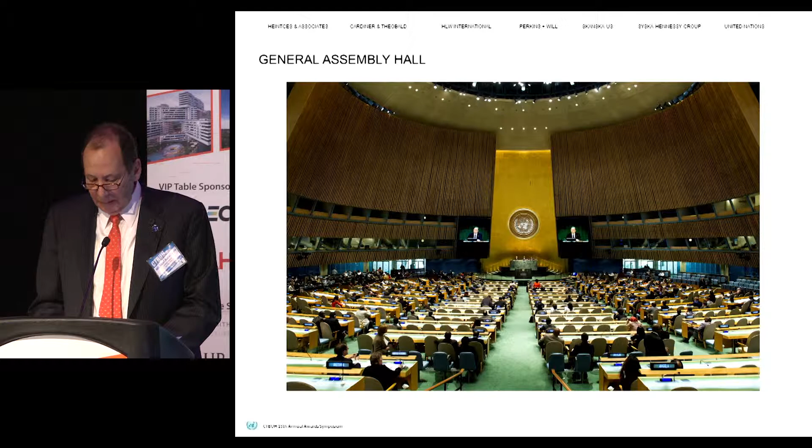There were other important drivers to the Capital Master Plan as well, and a critical one was to improve the functionality of a facility designed for 50 member states in a family that has grown to 193 countries. Another was to make the headquarters accessible to all.

The UN headquarters was completed in '51 in accordance with the New York City Fire Code at that time, which dated from 1938. Much has changed over the years, but up until 2010, the UN headquarters remained largely unaltered. Consequently, much of the complex lacked sprinklers, fire and smoke detection, and modern building management systems. All of this has changed during the Capital Master Plan.

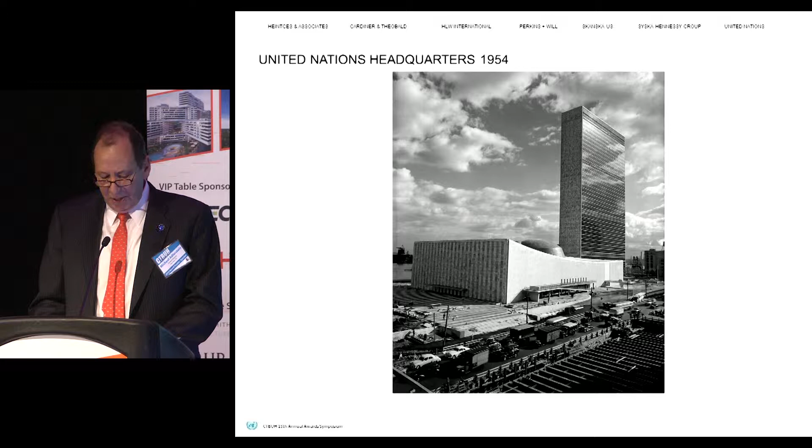Although the United Nations is sovereign and therefore not subject to New York City building codes and other regulations, at the beginning of our project, we reached an agreement with city authorities to voluntarily apply the New York City Code to our project. We did not file for building permits or await certificate of occupancy, but the city agreed to review our construction documents and conduct voluntary visits, which were not inspections, to review our work every two weeks throughout the project. As the New York City firefighters are the first responders to any emergency at the UN, it is certainly in our mutual interest for the host city authorities to be familiar and comfortable with our facilities.

A primary concern of the United Nations in the 21st century is security. Unfortunately, the United Nations has in recent years been the target of terrorist attacks in Baghdad, Algiers, Kabul, and elsewhere. On First Avenue, we installed blocks of bollards, among other security measures, and we added layers of steel and concrete over the FDR drive. Due to necessity, our project required significant improvements such as these to the security infrastructure to provide greater protection to the UN staff, visitors, and delegates.

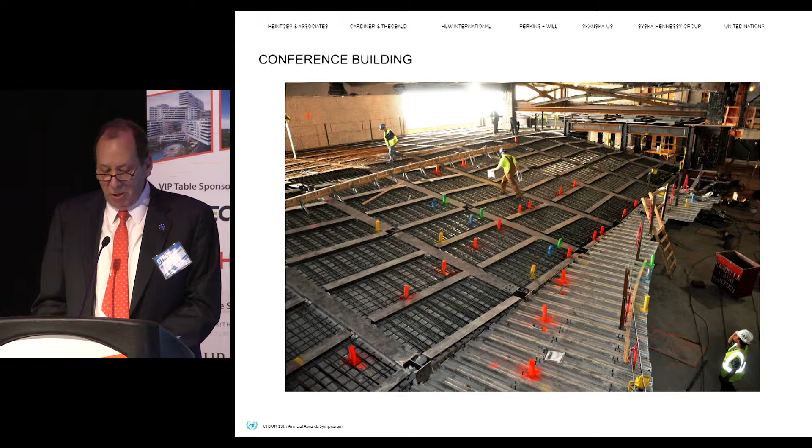I can take you back to the amazing charrette that created the United Nations compound. The General Assembly decided in 1946 that the headquarters of the UN should be in New York City, and an international design team was selected and assembled by the UN, known as the Board of Design, with Wally Harrison serving as director. The board consisted of a dozen outstanding professionals, each representing a different country, including Le Corbusier representing France, Oscar Niemeyer representing Brazil, Nikolai Bassov representing the Soviet Union, and Howard Robertson representing the UK.

In four months, in 1947, the board hammered out a final design concept that was presented to and accepted by the General Assembly. The UN compound is generally unchanged from that concept, developed in just months in a design charrette by a dozen-person team that had never worked together before and spoke no common language, except design. Their success is obvious. The UN is one of the few examples of 20th century, mid-century design, modern architecture, which is today recognized all over the world.

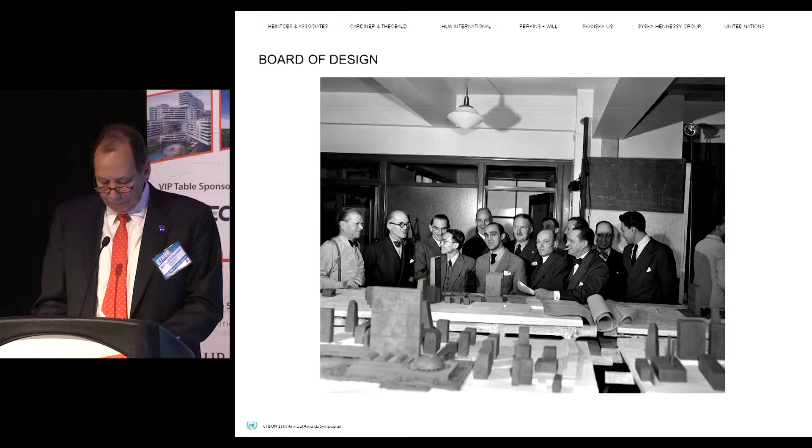The UN complex includes six buildings totaling 2.6 million square feet and houses approximately 6,000 full-time staff. The complex helped define modernism with its simple and sensual lines, its generous use of glass, and the incorporation of post-war high-tech materials like Naugahyde, Formica, and stainless steel. And in the 1950s manner, it was sustainable, with east-west rather than north-south exposures, large open spaces saved for the garden, operable windows, and many other green measures. Features such as the use of local materials were incorporated, not to save energy, but to allow the composition to fit in with nature in a more harmonious way.

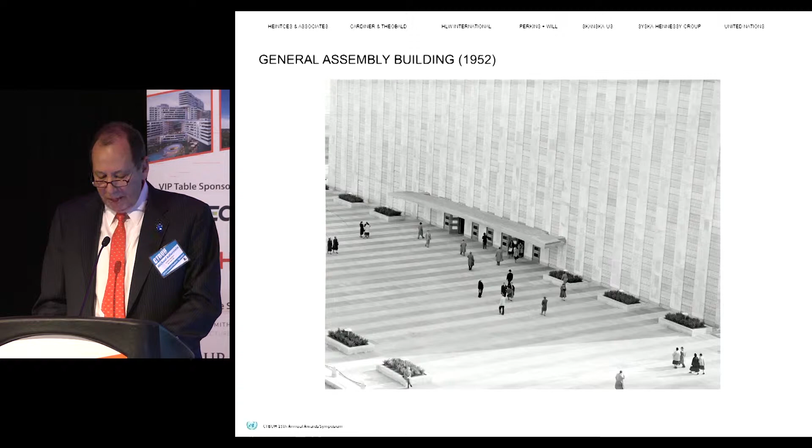At the time it was built, the 17-acre complex was considered to be one of the most highly innovative facilities, employing many new technologies.

The technology was cutting edge. The very high-tech glass curtain wall of the Secretariat was one of the first of its kind of that scale, later followed by thousands of buildings. The use of river water to cool the chiller plant equipment was also ahead of its time.

But by the end of the first decade of the 21st century, our facility had aged and needed a facelift. Our mission was to manage the renovation of the UN headquarters in order to create a modern, safe, sustainable work environment.

After years of debate, which began in 1998 and following approval in 2007, the construction and fit-out of temporary office space started. Throughout the years, we signed leases and arranged the fit-out of major blocks of office space in commercial buildings, mostly in Midtown, and in the vicinity of the UN compound in order to provide swing space for the thousands of staff that had to be relocated.

We needed to build a temporary home for the conference building phase and then for the General Assembly phase, the temporary North Lawn building. This went into service in 2010. The Secretariat Building renovation was completed in mid-2012, and the Secretariat Building's first occupants were brought back home during the following few months.

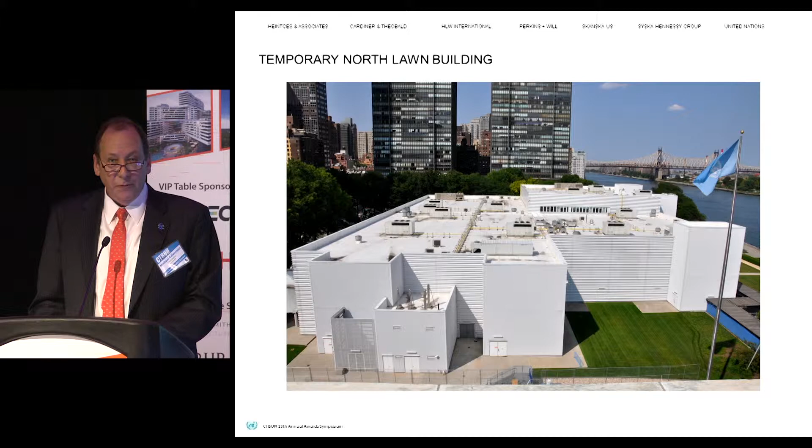Infrastructure work in the basements was into its 3rd year when Hurricane Sandy hit New York City, damaging our equipment in the basements and causing a delay to the project. We accelerated our work with additional overtime and completed and occupied the conference building in 2013, and a few months later we emptied the General Assembly in preparation for its renovation, which was completed just a couple of months ago.

The overall cost of the project was $2.2 billion, and it's presently just 11% over our original approved budget 8 years ago.

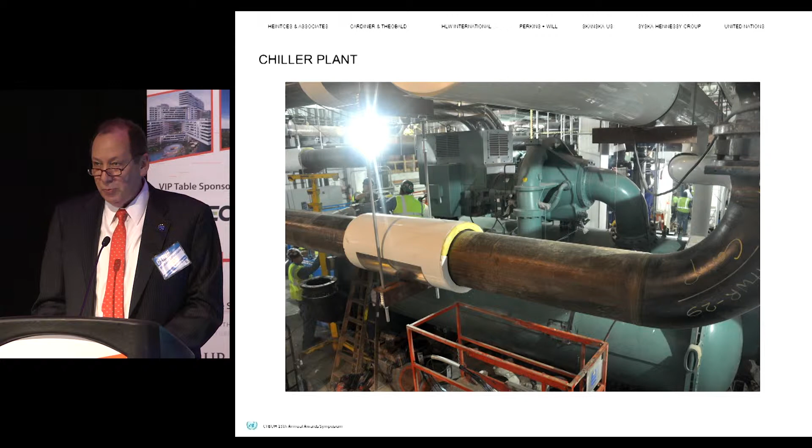The cost of the project was funded by member states of the United Nations through a special 5-year assessment. The funds are paid by all member states, divided with a formula that reflects the economic strength of each member state. For instance, the US pays 22% of the assessment because it represents 22% of the world gross national product.

We assembled a highly skilled team of design and management professionals, including HLW International, Heintges, Perkins & Will, the Syska Hennessy Group, serving as our engineer, and Skanska serving as our construction manager, and Gardiner & Theobald as our program manager.

Our project challenged and changed many aspects of the UN culture, but none more so than the enclosed culture of the UN, offering instead open office layouts.

We measure our performance within a variety of different performance metrics. Most importantly, we've reduced total energy consumption of the United Nations by over 50%, and we've reduced our carbon footprint by over 45%. We've also reduced our consumption of water by over 40%.

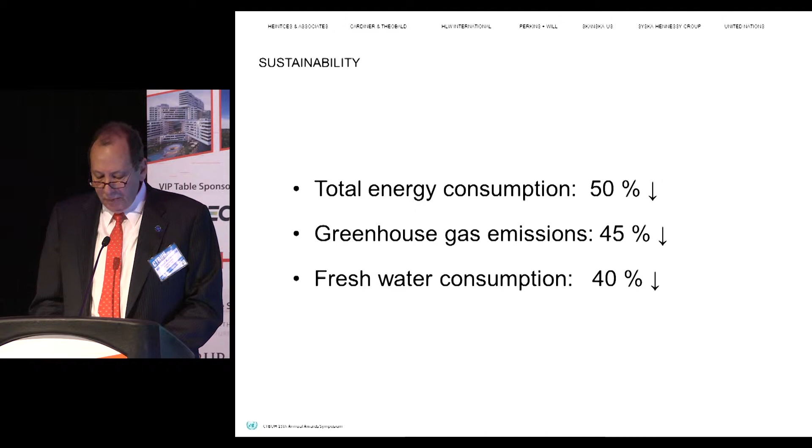All these steps will result in a very green, sustainable project. However, as previously stated, due to the international character of the United Nations, the project will not be certified by USGBC or any other system.

The project meets the criteria of LEED's Gold and achieves higher ratings in the BREEAM system of the United Kingdom, the CASBEE system of Japan, and the Green Star system of Australia. These are all commendable and competitive systems, and I strongly support their basic concept, rewarding sustainable new construction.

However, I must note that none of these programs provides proper credit and therefore encouragement for the single most important decision that a building owner makes, which is whether to build anew or to restore its existing buildings.

Recent news articles reinforce the worldwide impact of climate change. Its impact is quickly overwhelming the low-level occupants of our planet and will impact us unless we all take stronger action. I'm often asked by member states if it would have been less expensive to completely demolish and rebuild the UN.

It's a reasonable question, and the answer is no. Even aside from the obvious loss of historic and iconic cultural values, it would not have been less expensive. And from an overall energy and environmental standpoint, it would have been a significant waste of carbon. By far, our most significant achievement in the area of sustainability is the avoidance of the expenditure of the embodied energy that's incorporated in our buildings.

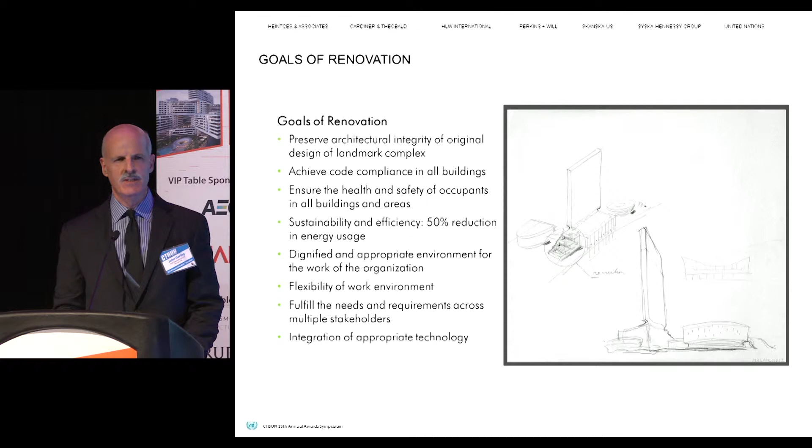When we started the renovation of the Secretariat Tower, one of the first things we did is to establish some clear goals for success of the renovation. And the one goal that came to the top was to preserve the integrity of the existing complex. That was in direct conflict with what needed to happen going forward in terms of introducing new levels of technology into the structure. So one of the first things that we looked at is the footprint.

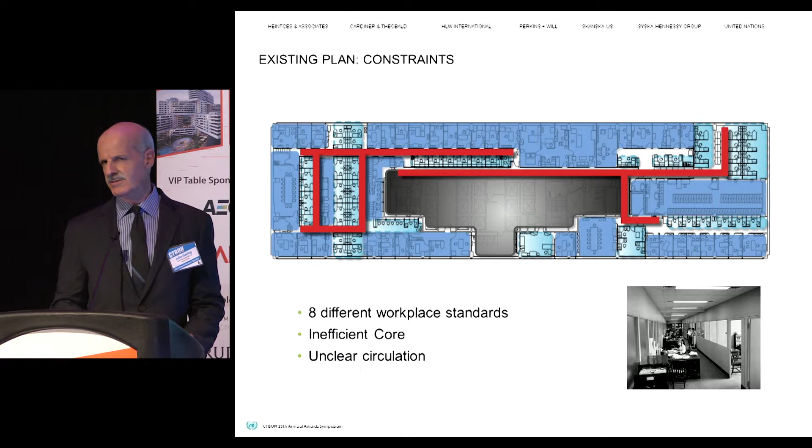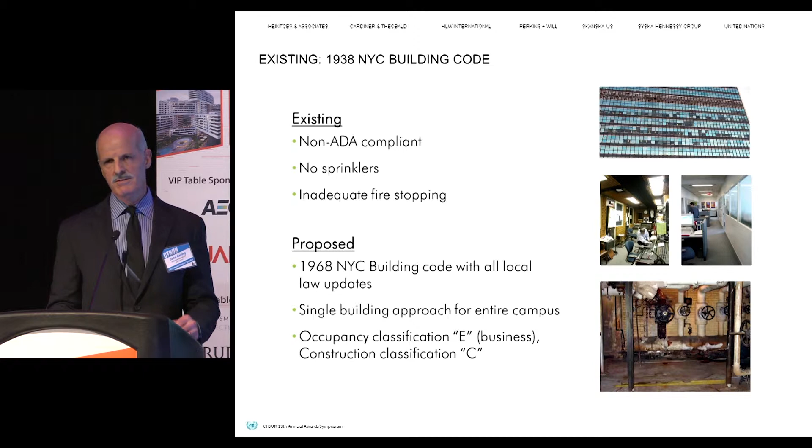This building was built under the concept of the 1938 code, as Michael alluded to. It wasn't ADA compliant, had no sprinklers, very little fire protection.

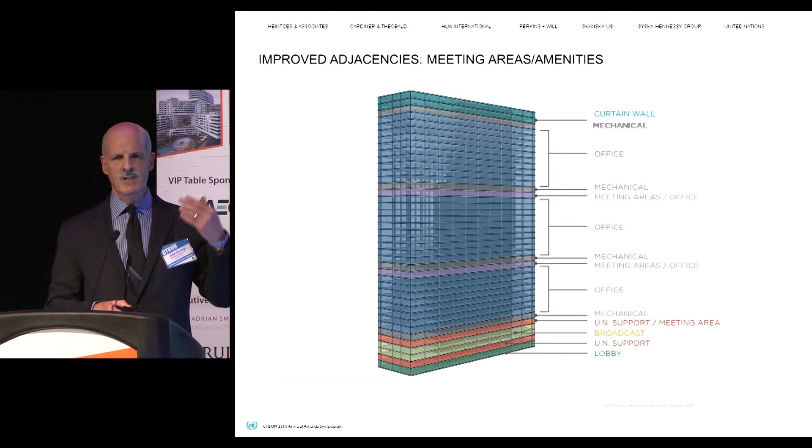So one of the things we did is we stood back and developed a master plan with Perkins and Will on the program side, and we divided the building into 4 distinct categories. The base of the building is lobby space, cafeteria, support, and the remaining 3 chunks of blue are office space, capped with a conference zone and a mechanical zone.

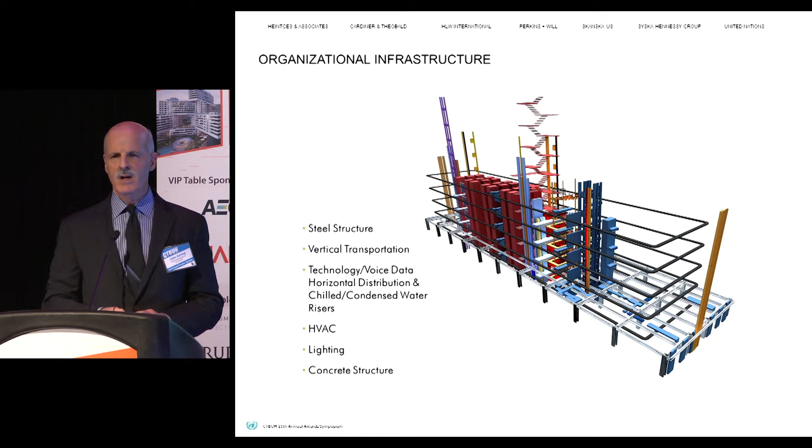We also overlaid the infrastructure on the master plan working with Syska Hennessy. We defined vertical pathways and horizontal pathways in a way that this building has never seen before.

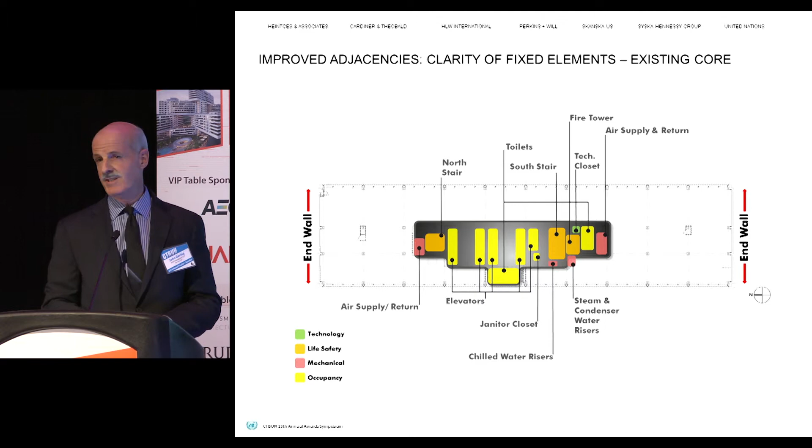Looking at the existing core, you'll notice the yellow box on the bottom, that's the toilet core. It actually hugs the window wall. There was actually a joke at the UN that the best views in the house were at the toilets, because the reality was not many people had access to light.

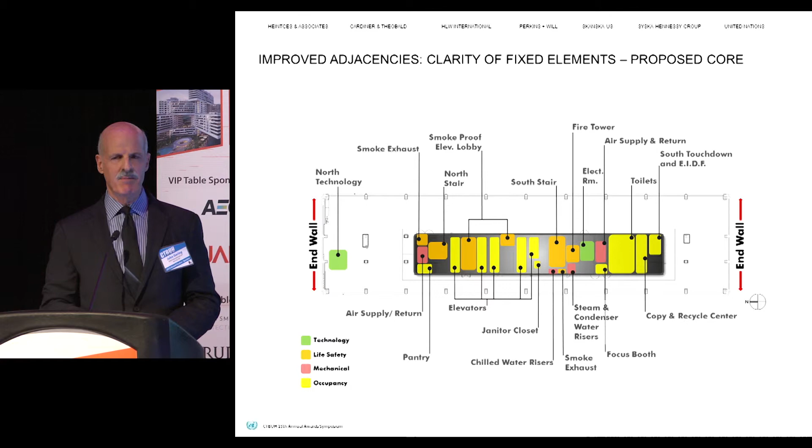So one of our strategies was to clean up the core. We clarified circulation in a way that one can circulate completely around the core, and we provided capability vertically and horizontally. This is an example of a typical open plan, which allows natural light, which allows views to the outside, provides clear circulation around a reorganized core, and defines space for high wall space on the end walls, which are fairly solid.

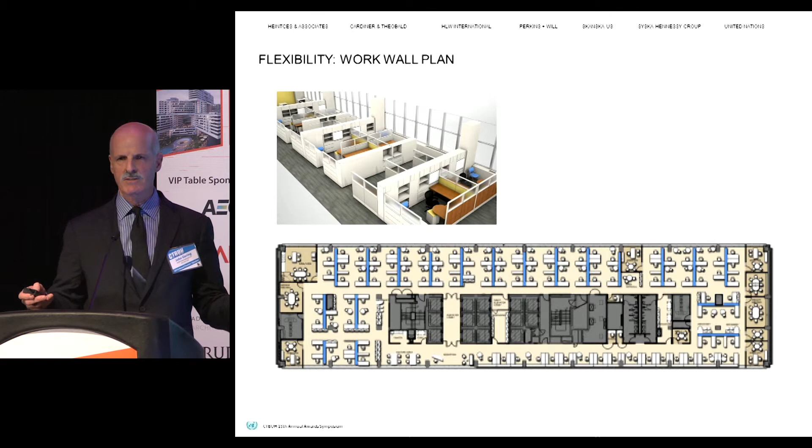Now looking at the outside, there's 2 systems on the facade. A very traditional system, which is the end walls, which is Indiana limestone on block backup. And then we have the curtain wall. The curtain wall was essentially a grid frame construction and a series of inserted double hung windows.

This is one of the first of its kind. We had the Equitable building in Portland in '47. This was in '50, '51. Then we had the Lever House in '52.

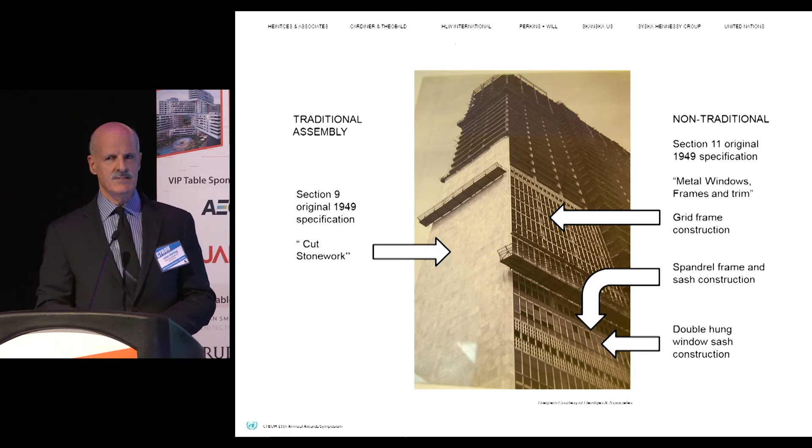When one looks at the UN, most are familiar with the green-blue tinted glass. The reality is, as the image on the right shows, the original design of the glass was fairly transparent, where one could see the columns. We worked with Bob Heintges, and Bob and his team were involved in the overall analysis and the design of the exterior window wall.

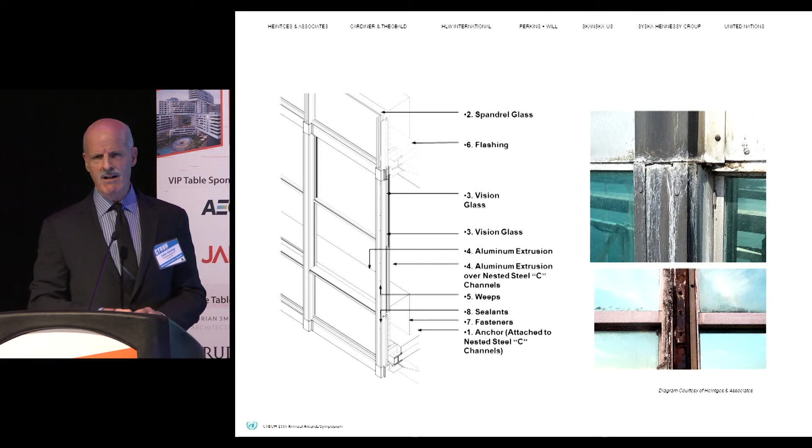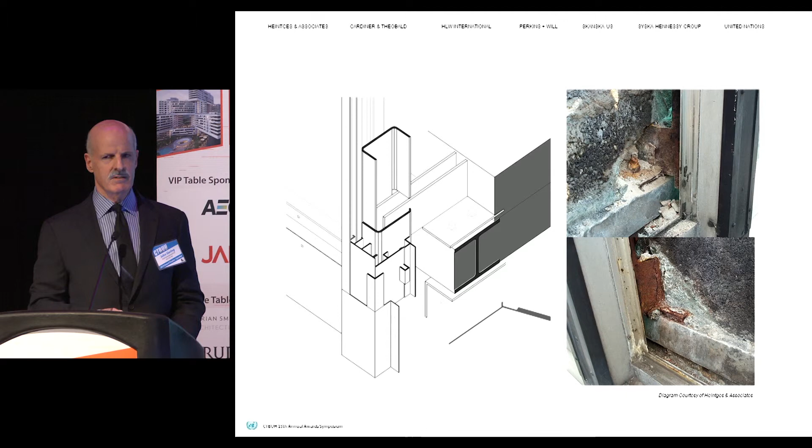A lot of corrosion at the window mullions. This is at the slab edge condition, where one looks at the anchors. 90% of these anchors had corrosion. Not a stable environment for the UN to go forward in.

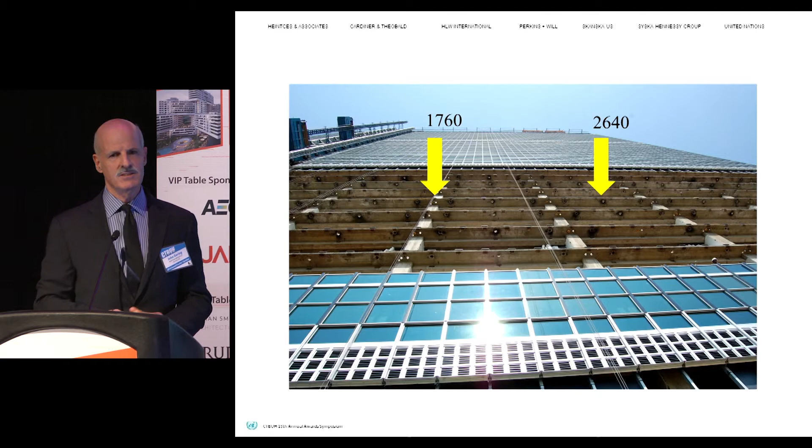We looked at the slab edge condition. It actually looks like Swiss cheese. These are 4,400 penetrations in the edge of the slab. Fire hazard at best. So the UN had to make a decision.

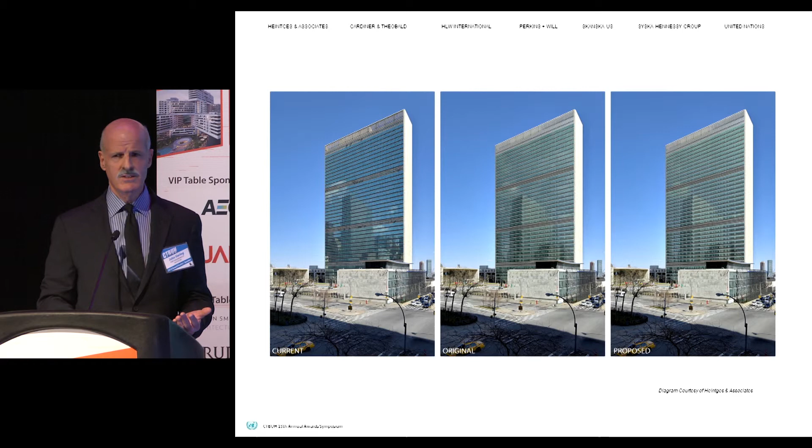Do we repair it? Do we restore it with double hung windows? Or do we replace it? And the UN decided to replace it.

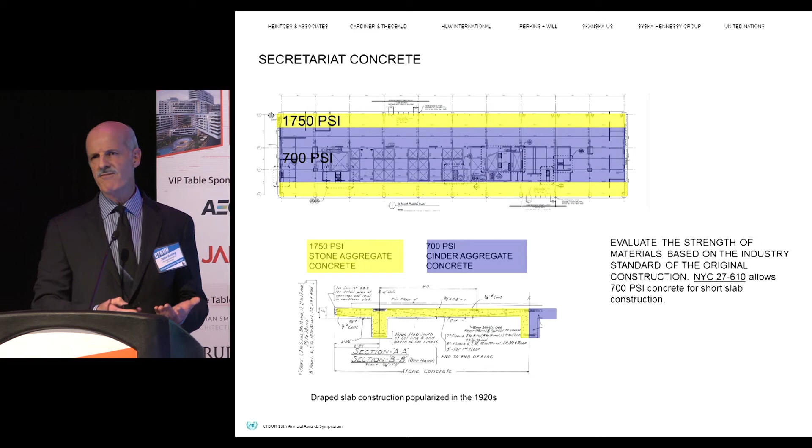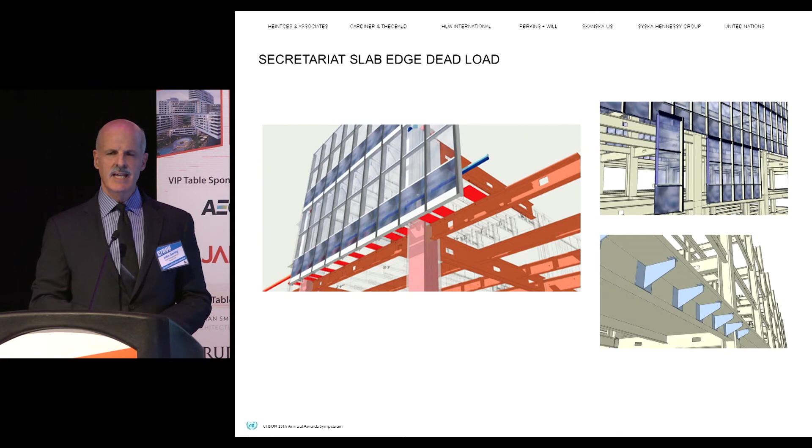So what we did is we decoupled the design of the structure. We let the slab as existing take care of the dead load, and we inserted a series of structural outriggers, as defined in red, to deal with all the lateral loads, defining a composite system.

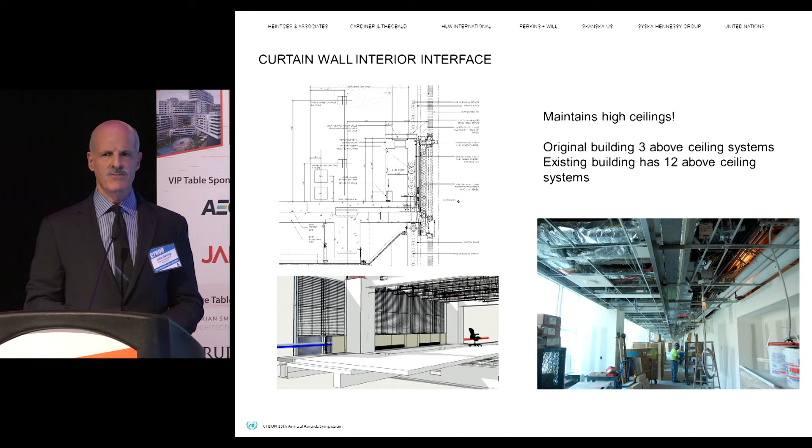We also looked at the interior curtain wall and the lighting assemblies in the sandwich. The sandwich was 12 feet, slab to slab. The ceilings as existing were 9'2". We maintained a 9'1" ceiling system by the nature of changing the structure above from 3 systems to 12 systems above that ceiling.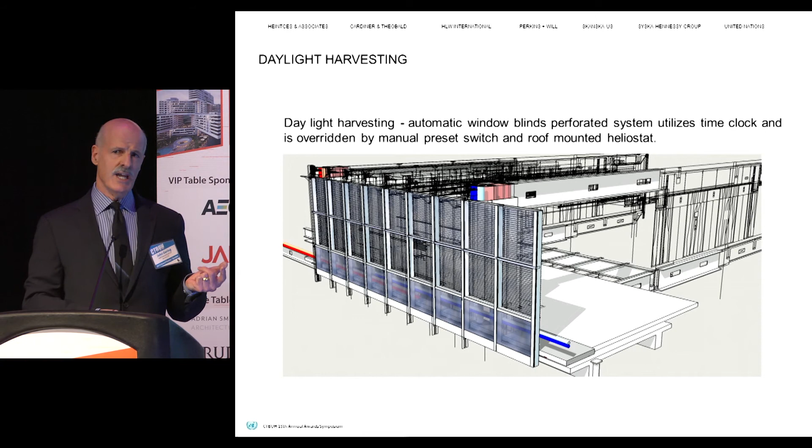We also looked at daylight harvesting in terms of how one can modulate shades and how one can modulate lighting. As the shades went up, the lighting went down.

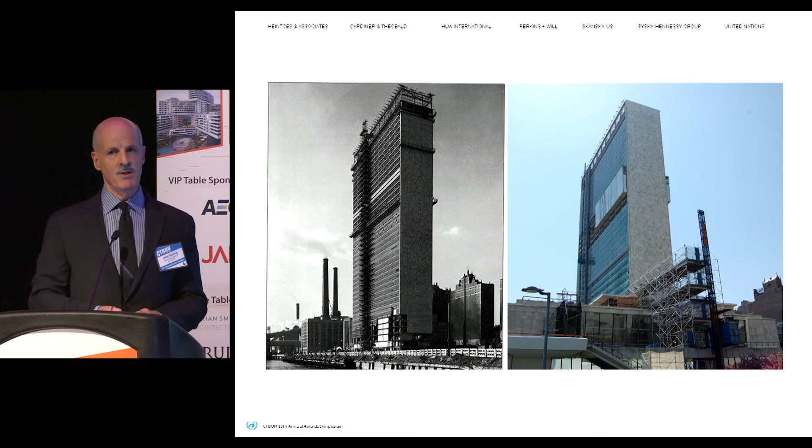We actually built the building from the top down. As you can see on the left, 10-floor zones of installing the facade and building the overall interiors that paralleled with that. And last but not least, you can finally see through the building, and it's fairly respectful of what the existing architecture was.

And when I started the project, I actually had a saying with the team. This building was once a prince. It really turned into a frog, but I think we turned it back into a prince again. Thank you.